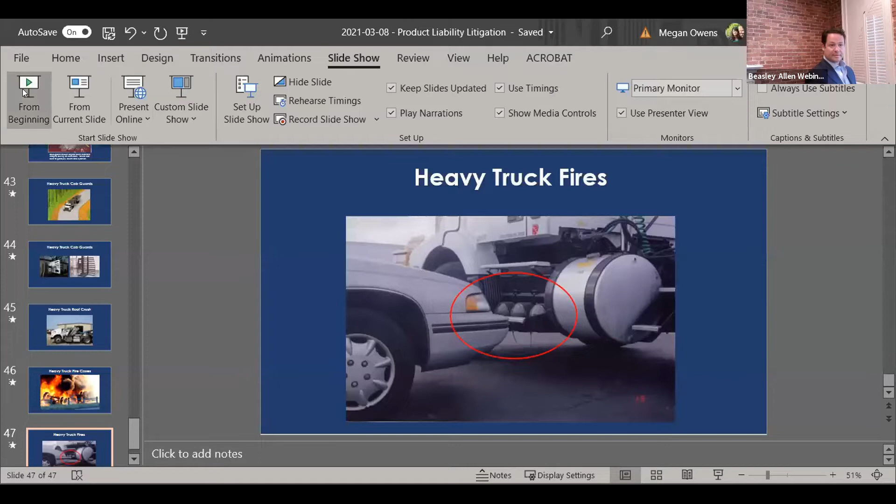And here we go. All right.

So as I stated, we have a new world. When I first started doing this, there were very few recalls. The Firestone tire got recalled, but they didn't recall the Explorer. Most of the defects I saw on a day-to-day basis didn't involve a recall - it was just us as plaintiff lawyers saying, hey, this vehicle's defective.

But what we're seeing now is NHTSA's in a new day. They are recalling products, and when car manufacturers aren't following the law - supposed to report defects, supposed to get defective vehicles off the road through recalls - they're being fined. We've seen one record fine after the other in probably the last 10 years, going back to about 2014 until present. Mercedes-Benz was recently fined, Volkswagen was recently fined, Toyota was recently fined a big fine. Those are big.

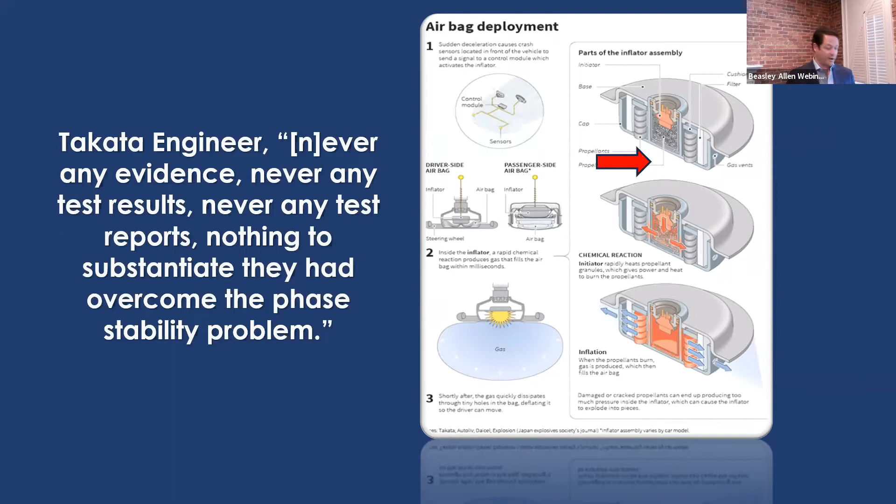And I got a video here, I'll show you of it. But ammonium nitrate was never phase stable - the engineering term - which you've got to understand is that it's got to be able to stay in that aspirin form for years and years and years.

When ammonium nitrate gets moisture, humidity, or exposure to the outside elements, it'll break down, and that causes the Takata airbag to fail when it's supposed to protect you. It actually turns into a weapon and injures you. Here is a video.

This was a test done by the National Highway Traffic Safety Administration, where they actually tested an airbag, and it's unbelievable to watch how forceful it is. Watch this explosion that goes off in your face when this defect fails.

I have had countless clients who've had that exact thing happen to their face. We do a lot of Takata airbag cases in our firm, and it saddens me every time.

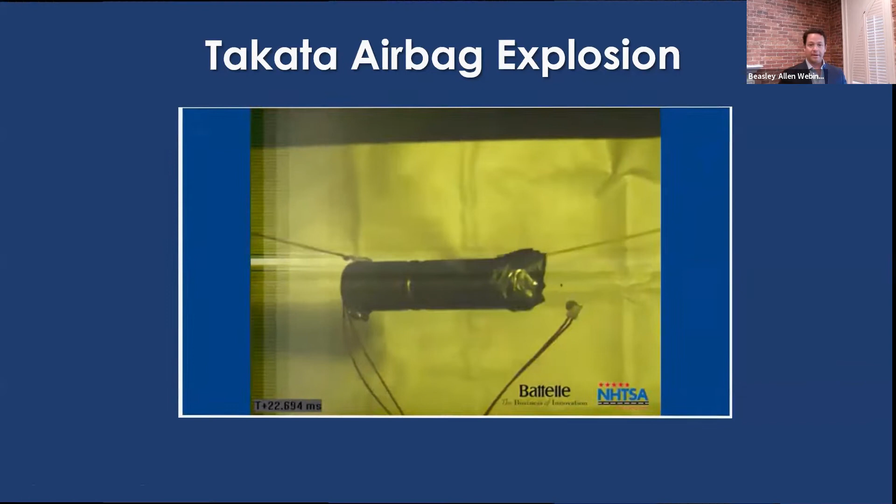I'll show you a little bit about it—if you're squeamish, you might want to turn away. But here, these are some of my clients, and this is what happens to you when an airbag goes off—the metal turns into a bomb.

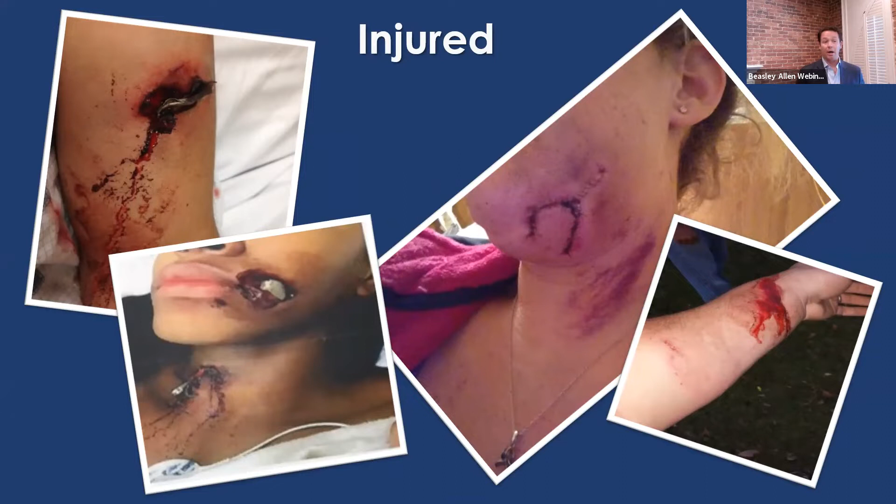The metal fragments come out of the airbag and become shrapnel, just like a hand grenade. It's used in the military. It's no different at all.

The very first Takata case detected, I believe, was in Alabama. The second one was in Florida, and the lady had been hit in the throat. She had bled out and died. The police were investigating it as a murder because they thought somebody stabbed her in the throat, until they found the shrapnel there and were able to determine it came from the airbag.

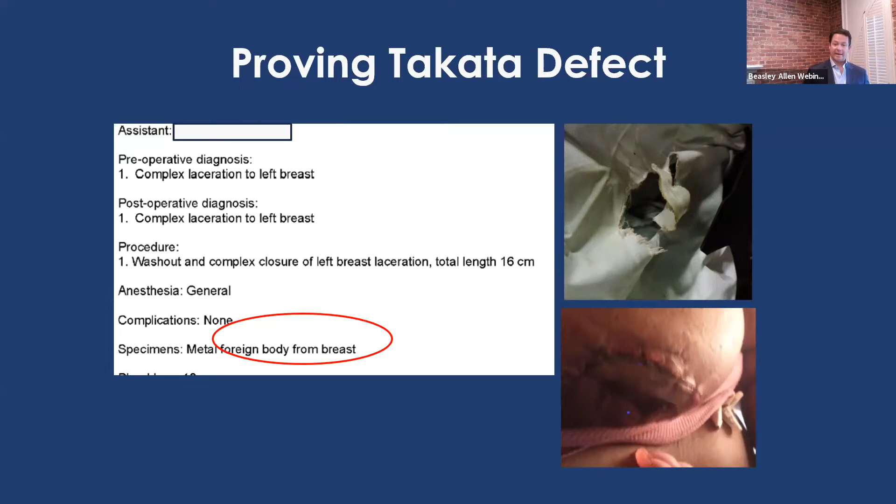Here's another one—this is from a discharge summary, and it had a metal foreign body found in the breast. You can also look at the airbag itself. As you can see on the side of the screen, the hole in the fabric of the airbag is certainly not supposed to be there. What happened was that metal shot through the bag and into my client's breast, causing that serious laceration.

This is another case I'm currently litigating in New Orleans, involving the Ford Ranger. The Ford Ranger is quite possibly one of the more dangerous Takata airbags because of the way the inflator's made on the driver's side. You can see it up in the corner there, and it comes out like a shotgun slug. There's a metal round piece that goes in that hole that's missing, and when it explodes, it shoots out at you.

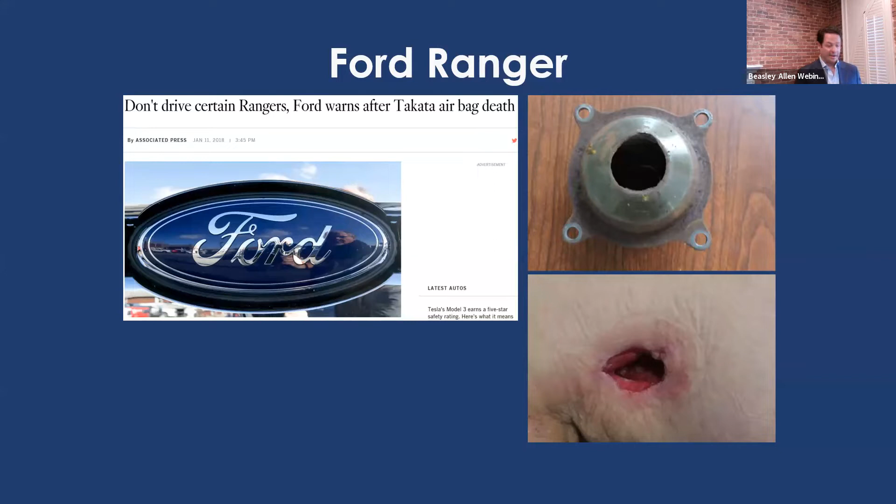My client is, I believe, the only living victim of this Ford Ranger Takata defect—though I'm not certain about that. He happened to be leaning over when it hit, and it hit his shoulder. Had he been centered on the airbag, it would have gone through the middle of his chest and likely killed him. That's the back of his arm—it went all the way through.

Another way to prove the defect in the Takata airbag is just finding the pieces. There's a piece of the inflator there. It's torn to pieces and can easily be detected as a Takata failure.

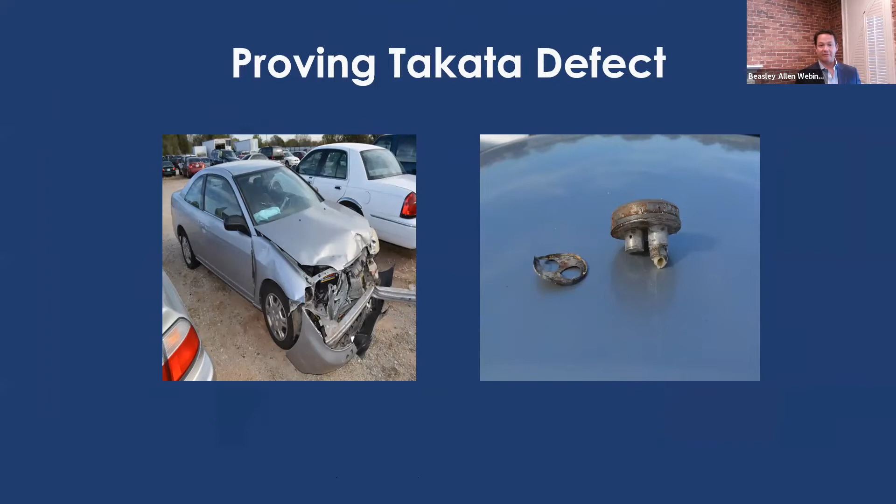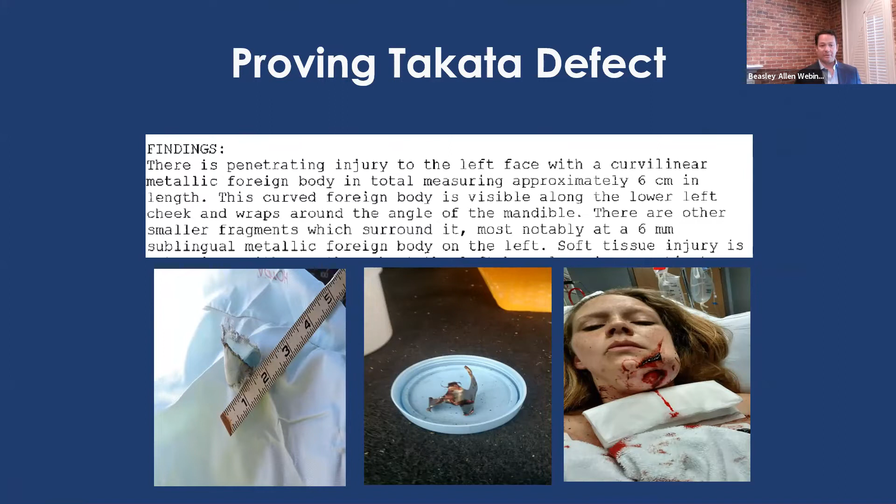Another one proving the Takata defect—you can see here all the things put together. You've got the hole in the bag, you find the metal shrapnel, and you've got the medical records. Here we've got the metallic foreign body found in this unfortunate woman's face.

So that's about the Takata airbag, but there's a lot of other defects we'll be talking about today. As we go through those—self-driving cars are on everybody's mind who does car wreck cases. I've talked to countless lawyers who are concerned about that.

People are even trying to look forward to see whether we should be changing our practices, because many lawyers rely so heavily on car wreck cases. What happens when the person we're bringing the lawsuit against is no longer driving? Do they even have to have insurance if they're not driving at all—the car is?

And so those are questions society will have to be answering over the next few years. This is a little bit of a taste of what I think will be part of the answer to those questions—this is what it would be like behind the wheel of a self-driving car, sitting just as you are, your hands not on the wheel.

Your feet are not on the pedals, and your eyes don't even have to be on the road. At Mercedes-Benz, we've road-tested autonomous driving over 10,000 miles on highways and in heavy city traffic. The future of the automobile, brought to you by Mercedes-Benz.

The best or nothing. So if my hands are not on the wheel, my feet are not on the pedal, and my eyes don't even have to be on the road, then Mercedes, you better do a good job of driving me. And I believe that these car wreck cases we see, if that becomes the case, that cars can self-drive to that level - and they can't today, no matter what you're reading in the news, we'll talk about that - but if cars get to that level, then yes, Mercedes and all the car manufacturers, you'll be responsible, I predict, for what happens to consumers and occupants of vehicles who are injured when the vehicles crash, and they will crash.

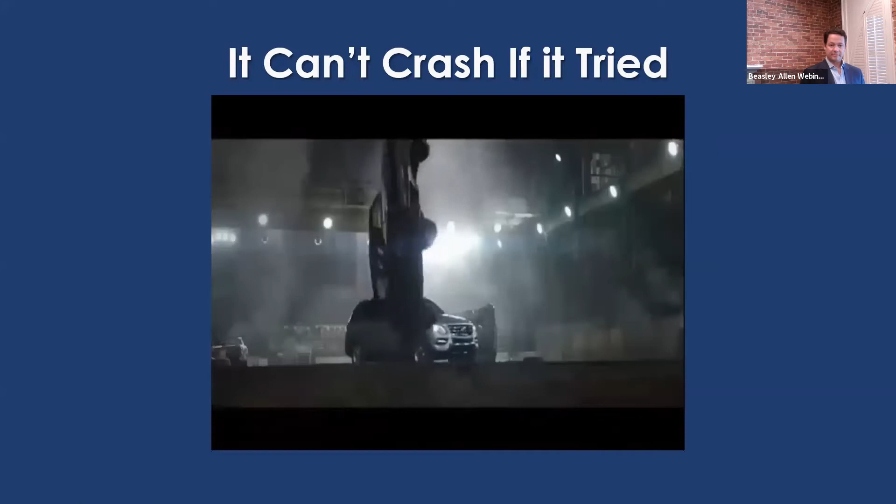It's chaos out there, but the M-Class sees in your blind spot. Pulls you back into your lane. Even brakes all by itself. It's almost like it couldn't crash even if it tried - the 2014 M-Class. I promise you, every car can crash, and they have.

Tesla, who's one of the forefronts in the technology, as far back as 2018, had a driver killed when the Tesla was on autopilot. The Google car has had hundreds of failures and 13 near misses as far back as 2016.

This is a funny video - this is that automatic braking system I'm talking about in a Volvo. I think this is maybe a Volvo XC60, and they're running a test. Listen to the countdown: 10... 5... This is my favorite part.

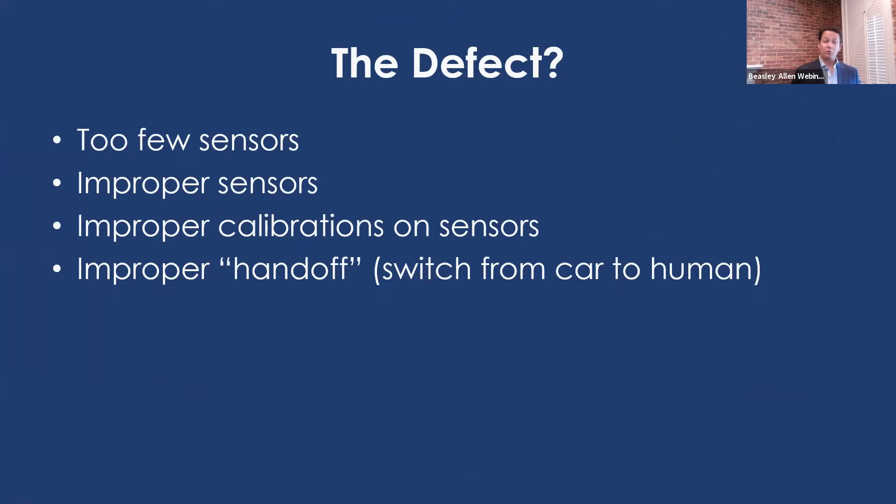Now, these systems have what's called LiDAR on them. It's like a radar, kind of a laser radar system. 1.3 seconds before the impact, the LiDAR system did detect the pedestrian. It did determine that emergency braking was needed, but emergency braking was not available when the computer was under control, and so it didn't brake. It didn't do anything. What was the problem? Did it have too few sensors, improper sensors? Were they improperly calibrated? Was the programming off? In that situation, it wasn't programmed to emergency brake.

Post-crash records revealed some problems with the system. Excuse me, that wasn't Uber, I think that was... let's see. Yeah, the Uber system had difficulty driving through construction zones. Drivers had to intervene far more frequently than desired, had difficulty navigating streets in busy city centers, picking up and dropping off passengers, and dealing with geography like hills. If we can't deal with hills with this system, maybe it's not ready yet, because where I drive, there are a lot of hills and a lot of those type obstacles.

We have to try to figure out a way to do something more for this family. They've lost so much. We learned that this truck had an active braking system that puts a visual audio warning into the cab saying you need to brake. Then it starts to brake itself if the driver doesn't respond to the audio visual aid. Then if the driver still doesn't respond, it goes full on braking with no driver input. That's how it's supposed to work.

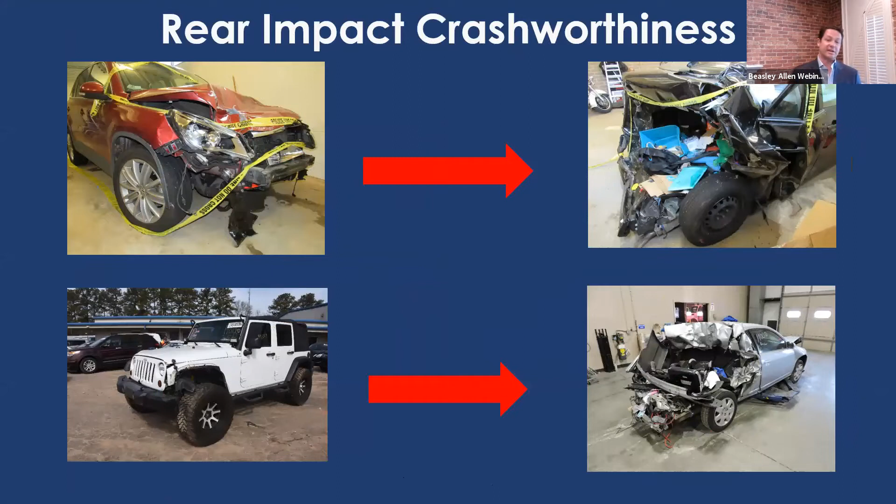This is the biggest defect I see, other than Takata airbags. This is the biggest defect that I see today, and it's rear impact crashworthiness. Cars are strenuously tested for frontal impacts. They do frontal impacts. They do full barrier. They do offset frontal. IIHS does some very extreme offset frontal, which is very difficult to pass.

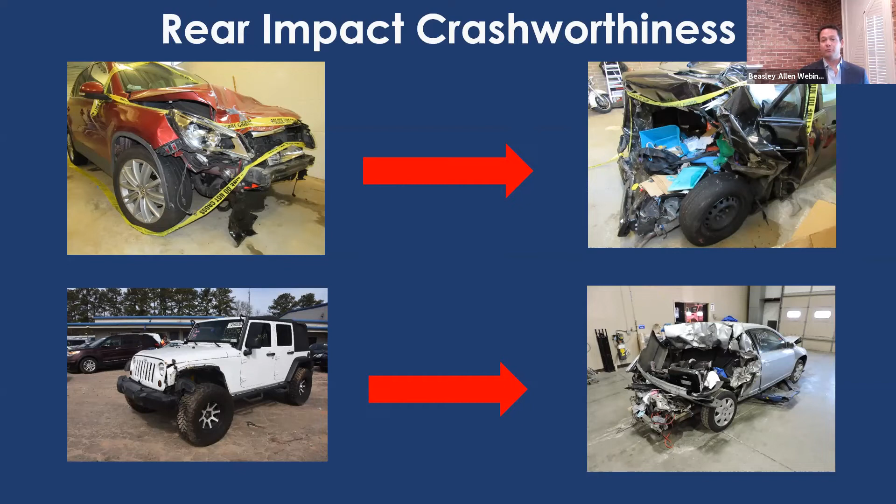Car companies know, based on standards set by the National Highway Traffic Safety Administration as well as industry standards like IIHS that give star ratings the public sees, that they have to make a car safe for occupants in a frontal impact, and they do most of the time. But there aren't the same standards, from government or industry, for rear impact. So what do many car companies do? They completely ignore the exact same technology they use to protect the front occupant. They don't put it in the back.

Look at these four pictures of cars. If I looked at these not knowing what I know, I couldn't put them together, because these vehicles that go together all underwent the exact same forces of the crash, the exact same speeds. By basic physics, they should have turned out the same, but they're not designed the same. The SUV at the top, the red SUV, hit the back of that Toyota. The SUV driver, completely uninjured, gets out and is fine. The young man in the back of the Toyota is killed.

Same exact forces, crushed the Toyota, because it's not designed to be safe in rear impacts. They don't have to test for it, so they don't. Look at that Jeep—it doesn't even look like it was in a crash at all. Yet that's the Honda it hit in front of it, completely demolished. The young man sitting in the back seat of that Honda is today paralyzed from the neck down. He's a wonderful young man, and we're fighting for him to get some help.

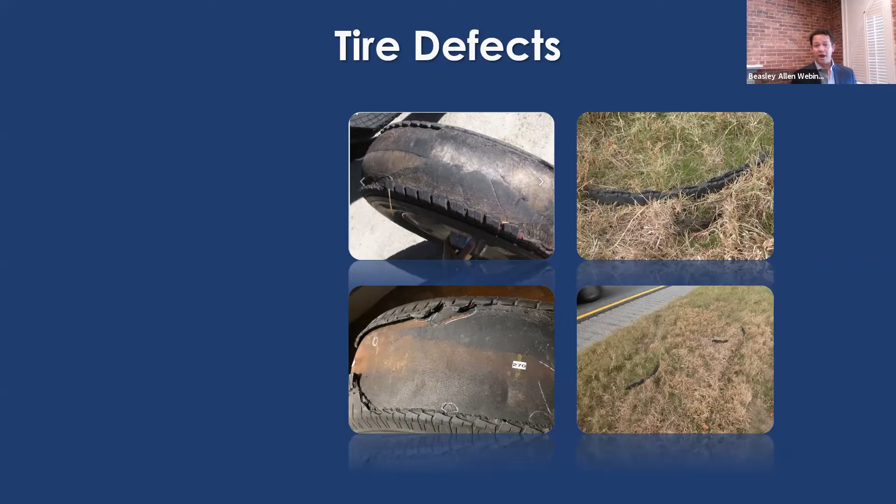One of the things car companies do in defending these cases, like a lot of their defenses, is say the driver should have done something different. It's not our fault—yeah, our tire failed, but the driver should have recovered, should have been able to maintain the roadway even with the failed tire. So to prove that, they ran a test. They wanted to show that when the tire fails, it's no problem—you can control the vehicle. This is a test that was produced in litigation.

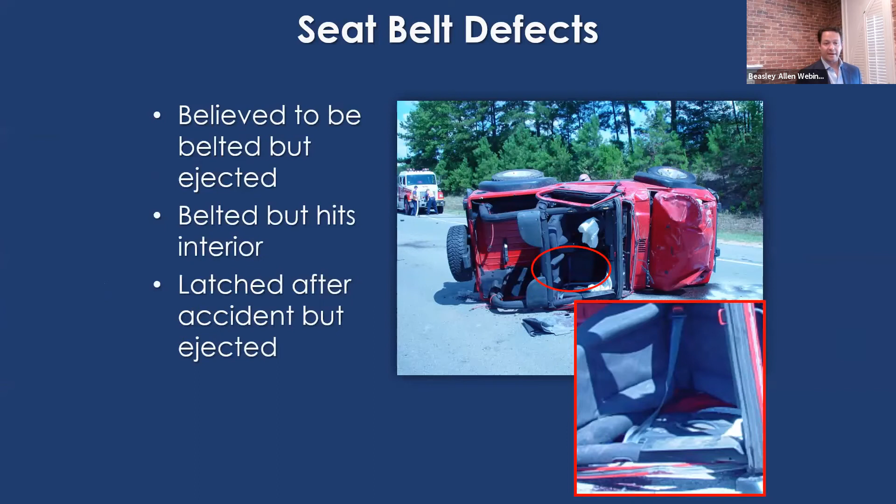After that case was over, that little girl called me after we had won. She was crying on the phone and she said, 'Mr. Glover, thank you. I had always thought that I killed my mom, but now I know I didn't.'

We made a difference in that case. We made a difference that was able to give her some peace, knowing that it wasn't her inexperience. That crash shouldn't have killed her mom. She should have walked away from it just like she did. But unfortunately, they made a decision to put a cheaper seatbelt in that vehicle, and it didn't protect the mom.

Fuel system defects are a big problem today. We've got a big case right now in our firm involving a Jeep Cherokee that exploded. It happened in Cobb County, and we're litigating it in Gwinnett County.

He was fine. He was in the same forces she was in, yet her car explodes. Folks, this isn't the movies. It is reasonable to ask anytime a car catches on fire why. In car crashes in the movies, they all blow up and there's fire and it's exciting.

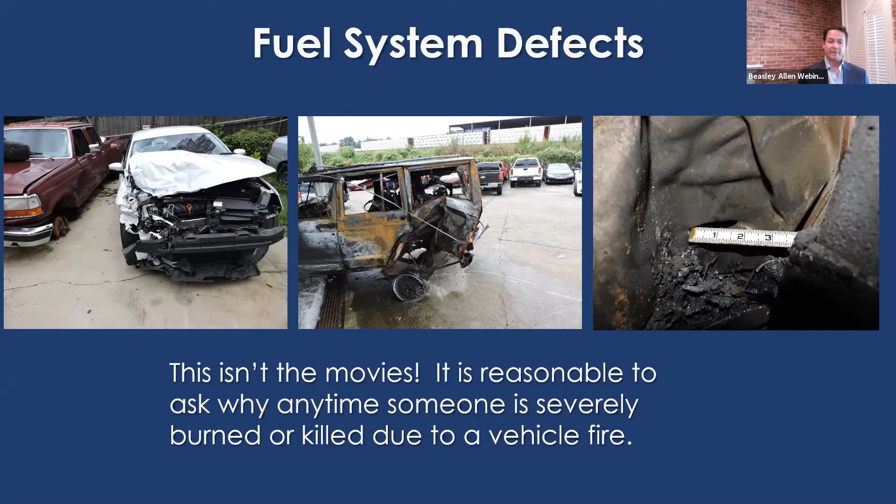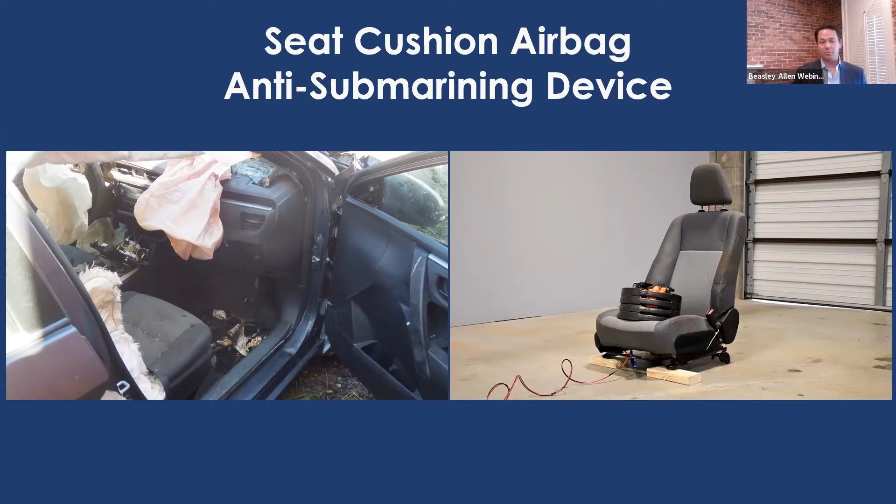This is another case that we're litigating now. This is a really exciting case for us. This is a new system. Cars have had anti-submarining devices in them for years. It's not new. What they want the system to do is prevent your knees from submarining forward, which would make you go down, and your hips would submarine.

And what can happen is the lap belt then loads your abdomen. The seat belts are designed to be on the hard surfaces of the body, like your chest, your shoulder, and your hip bones. When they get up onto your soft abdomen, they can cause internal bleeding and kill you. So they can design a seat to prevent that from happening. Well, they decided, hey, let's use an airbag instead of designing the seat that way.

So they put an airbag in the seat that's supposed to deploy and keep you seated correctly. The problem is if it goes late, like airbags sometimes do, if the sensor system isn't perfect, if it doesn't get the wreck detected in time and deploy the airbag in time, then your body can, instead of preventing you from moving forward, have already moved forward, and it goes off under you. And that's exactly what happened in this case.

It really just destroyed my client's back because she was sitting over this airbag when it deployed. So we ran a test. We put 100 pounds of weights over the airbag to see how strong this airbag is if you're sitting on it when it goes off.

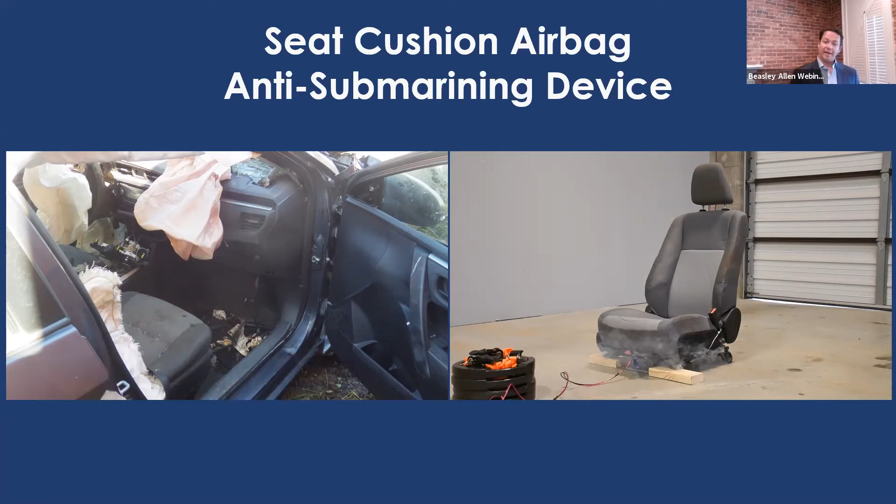And so watch this. That airbag is strong enough to knock 100 pounds of steel weights off of that seat. My little client, who weighed 100 pounds, had no chance when that airbag went off late and she was sitting over it.

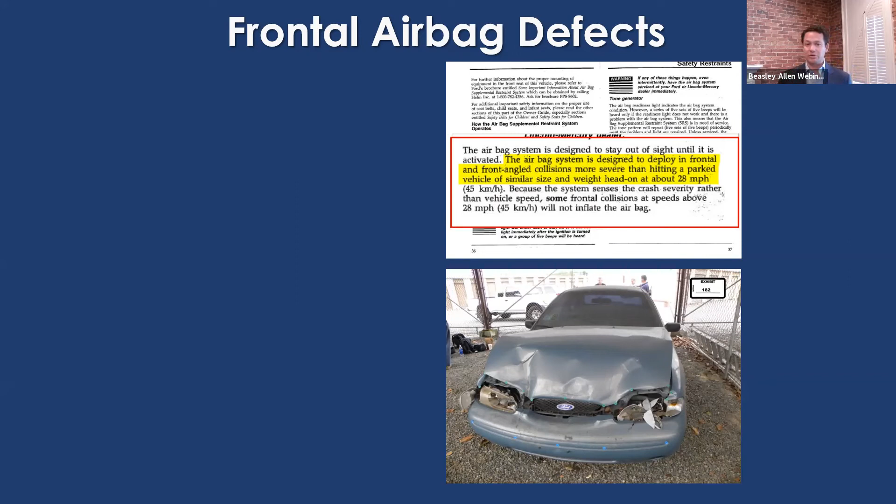And so we tried this case and had a good result. That's a crash case to be looking for. Another one is side impact airbags. A lot of cars are designed with side impact airbags these days. Almost all cars are now. And they need to protect you.

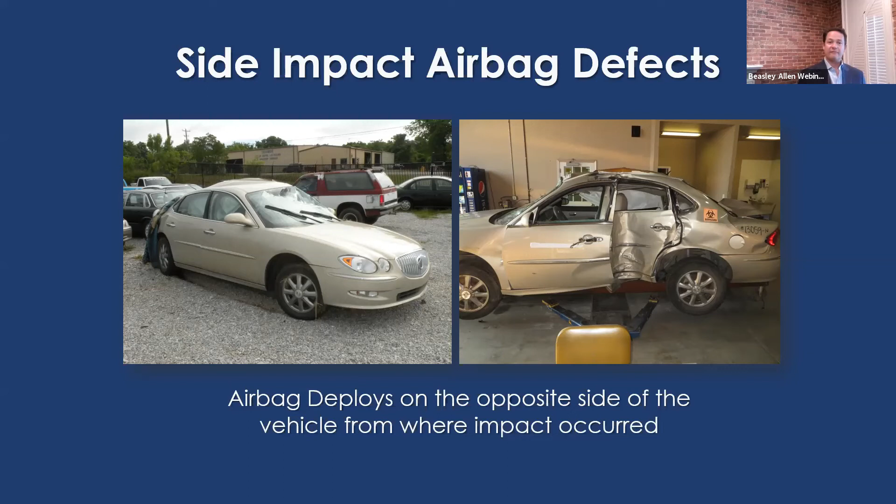This one, look at this. Look at the side of the car that has no damage. Look at the side of the car that's got extreme damage. This car got sideways and hit a telephone pole. And when it hit that pole, the airbag on the wrong side of the car went off, not the one where the impact occurred, which would have protected my client. He died of a head injury shortly after impact. And they didn't put the sensors in the right place to detect this crash. They saved money by only putting sensors in the front of the vehicle and not in the location where the crash occurred, so they couldn't get good information from the crash and deployed the wrong airbags.

Seat backs, seats are not supposed to fail. They're part of the restraint system, just like the airbag, just like the seat belt, just like the door I talked about earlier. And what happens is if the seat belt holds you in the front, but yet the seat back falls back, several things can happen. One, you basically can get shot out like a bottle rocket, and you can be ejected from the vehicle. You can hit the roof. If it falls back enough, you can hit the back seat, and it most often causes paralysis, and it's very sad. But the seat back needs to hold you up against that seat belt in order to protect you in the crash.

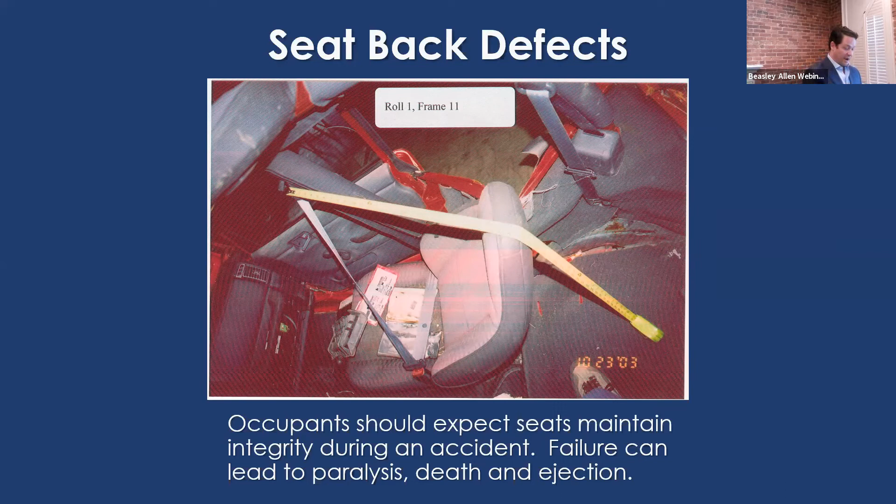Heavy trucks. A lot of people know about cases against trucking drivers and trucking companies, but there are cases for the truck driver too. A lot of vehicles have what's called cab guards on them, and those cab guards are sold to truck drivers to protect them in the event the load shifts forward. Our firm handles a lot of these type cases.

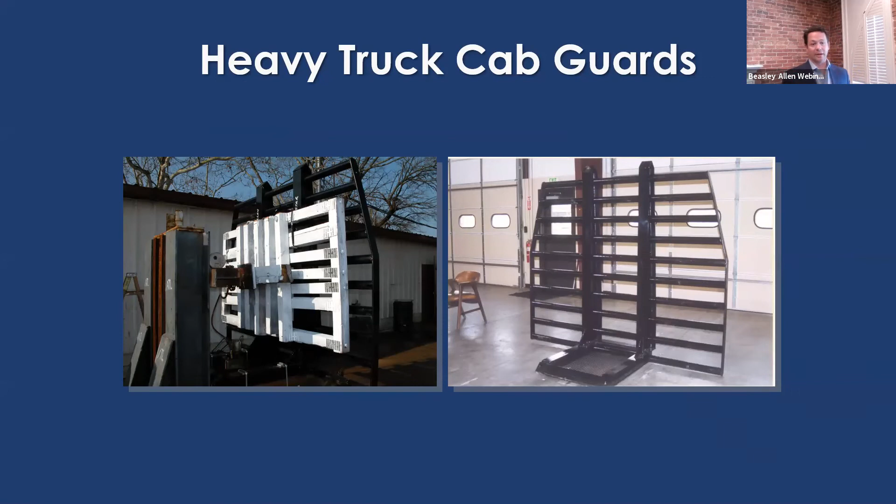Our firm built a cab guard with the help of some experts. They designed it for us, engineers, and said if they would have made it this strong, it would have prevented the load from shifting. So we went out, we tested it, and it would have, in fact, prevented the load from shifting forward. We've handled lots of these cases and tried a number of them as well.

Roofs on trucks are terrible. There's no standards other than some industry standards that are newly coming out, but there are no federal standards for protecting drivers of tractor trailers. They assume these things can't roll over, so let's not worry about the roof. Well, they can roll over, and they do. And when they do, it's so easy to protect these drivers by making a stronger roof that would keep the compartment from crushing down on them, but most often they don't do so, and we litigate a lot of these cases.

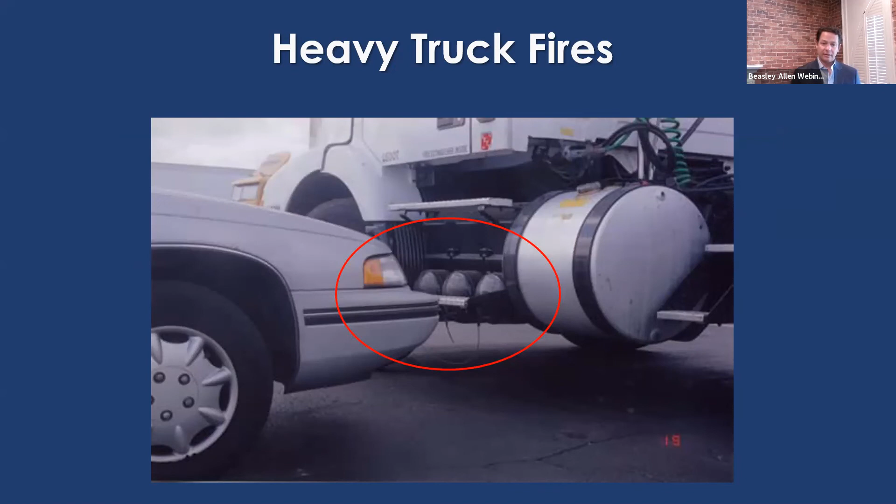One of the defects you see is the placement of the fuel system relative to an ignition source. In this case, you can see they put the battery of the tractor trailer right next to the tank. You've got an electrical ignition source next to a flammable fuel source, the tank, and if you get impacted in that area, then it's predictable that a fire could occur. One solution is to move the battery—if you take it out of that area and put it between the frame rails to protect the fuel system, then this won't occur.

Of course, there are so many more defects. When I talk to lawyers and they say, Chris, I'd love to work with you but I don't know what to look for, I gave you probably a sample of what we're doing right now—and it's not even all of it. I've got 13 partners who do just what I do; those are my cases, not even the other 12 and what they do. So I'll say, if you've got a catastrophic injury or death, just let us look at it, because I couldn't possibly put together a presentation that covered everything, and it's always changing. By the time I got it put together, I'd have to redo it. So those are the type of things we look for—there's a lot more than that.